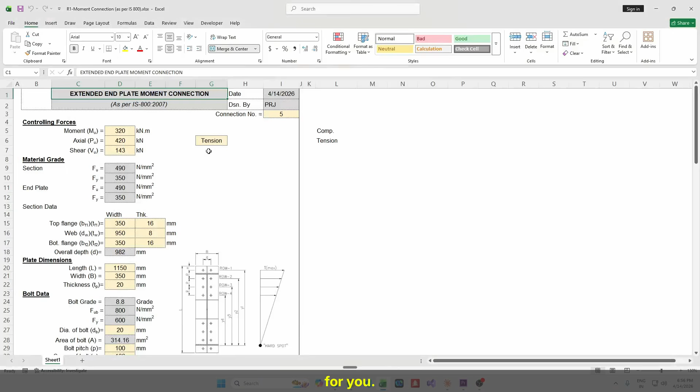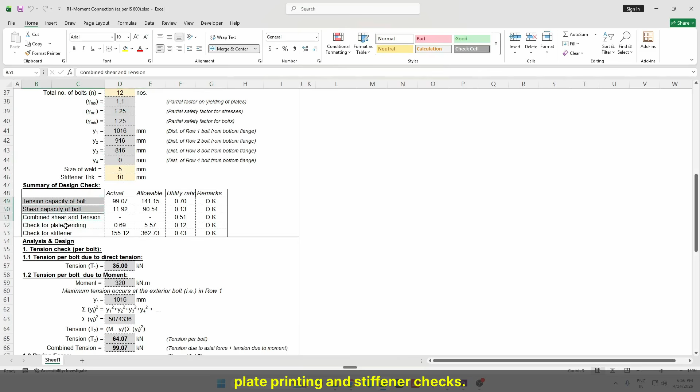This is a moment connection design sheet I built over the years as per IS 800 2007. It is an extended end plate moment bolted connection sheet which checks for tension, shear, interaction, plate bending, and stiffener checks. It works, it's reliable, and I have used it on real projects.

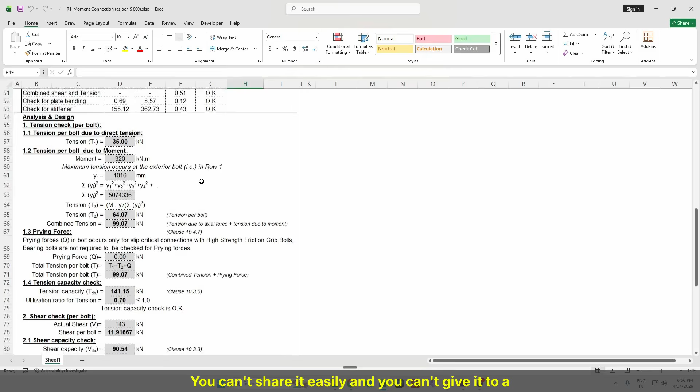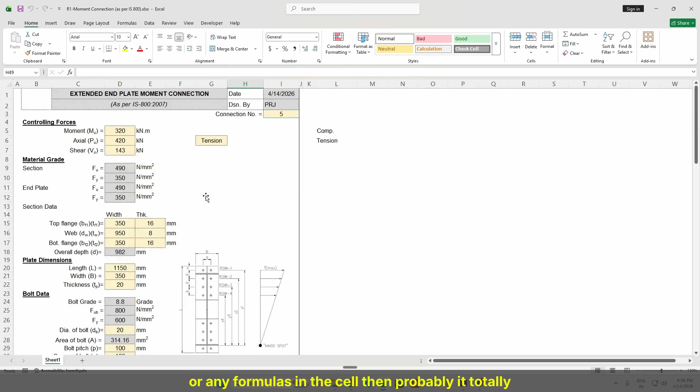But the problem here is it's just an Excel file. You can't share it easily and you can't give it to a client. You can't put it on a browser as well, and if someone else opens it and changes any formulas in the cell, then probably it totally breaks. So the question I had was simple: can I turn this into something better with AI? And that's what we are going to see in this video.

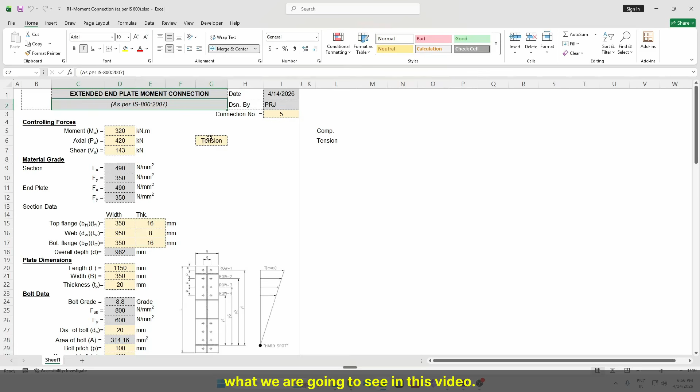First, I uploaded the Excel to Claude and asked it to go through every cell, every formula, and understand the logic. And I hope it did. It came back with a full breakdown: inputs, outputs, formulas, design checks. It even identified which cells were hard-coded and which ones were calculated. Then it asked 5 questions before writing a single line of code.

What technology, what visual style, should the number of bolt rows be dynamic or not? Do I want a PDF export or not? And should clause references be shown in the application or not? These are the 5 questions it came up with. Once I answered them, it wrote a full prompt for me. With this prompt, I moved from Claude chat to Claude Code.

Now Claude Code is something different. It's the talk of the town today. Claude Code is not just a chat, it actually builds. It writes files, it runs code, it checks its own work. It's kind of an agentic workflow. So whatever prompt I got from Claude, I just copy pasted into Claude Code and I was just watching what it was building.

It showed the HTML, CSS, the JavaScript, and all the IS 800 formulas replicated exactly. Step-by-step calculation output with clause references, a print to PDF design report, even a utility ratio progress bar which turns color. When the criticality ratio is more, it turns red, and it has certain ranges for green, orange, and red. The whole thing, one file, no framework, no backend, just a browser. The default values were loaded as well, and it is magical to see the output.

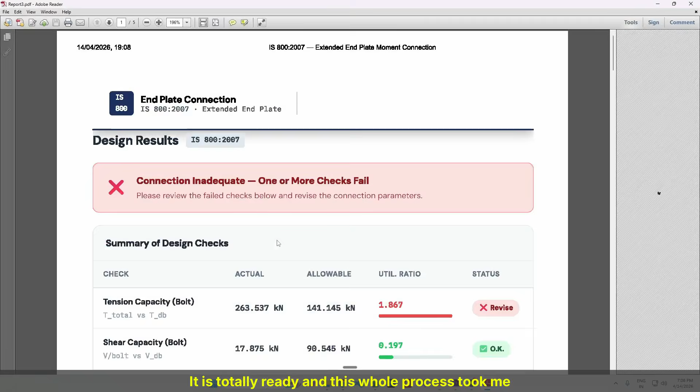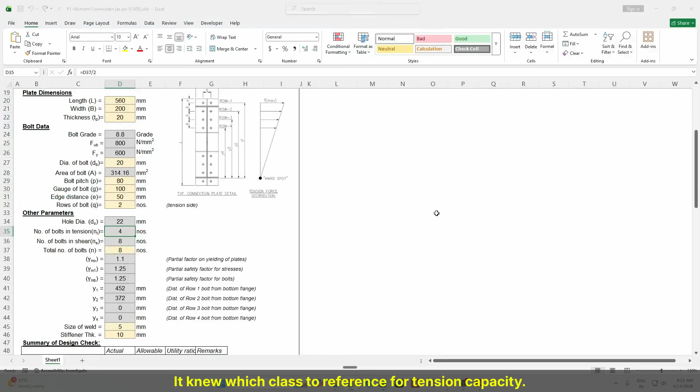Here's what surprised me most. It was not the speed, it was actually the conversation. Claude did not just execute, it understood the engineering, it asked the right questions. It knew which clause to reference for tension capacity. Now, does this replace engineering judgment? No. You still need to know if the numbers make sense. You still need to understand the IS code. You still carry the responsibility.

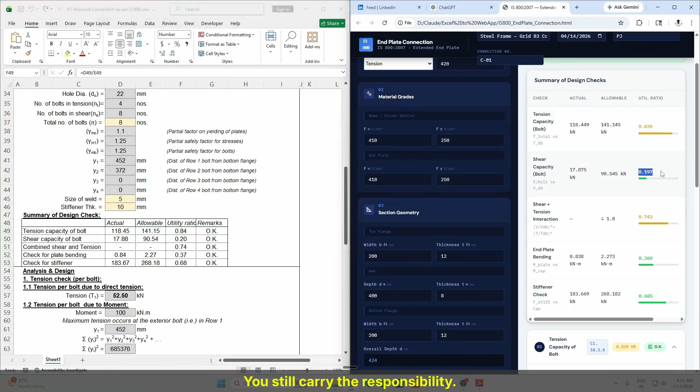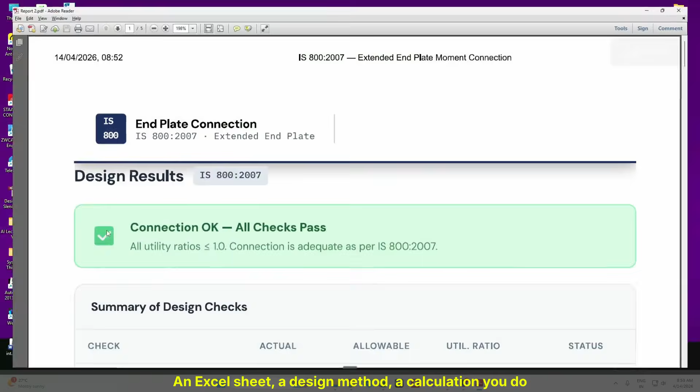But the gap between "I have a design method in Excel" and "I have a tool I can share with the world", that gap just got a lot smaller. For me, that's the real story here. If you're a structural or civil engineer who's been curious about AI but has not known where to start, start with something you already know: an Excel sheet, a design method, a calculation you do every week. Describe it, let it ask you questions, see what comes out.